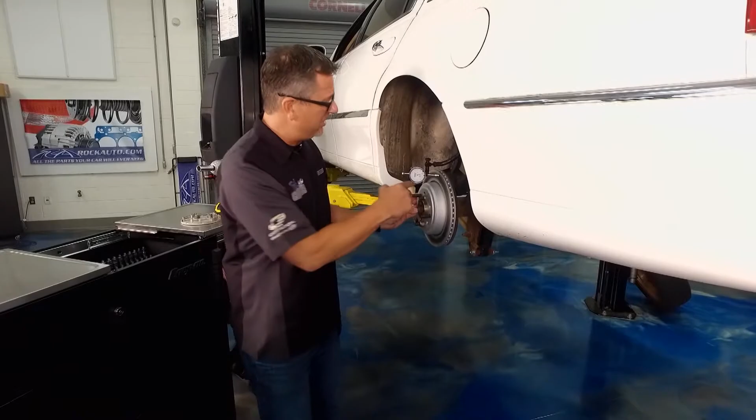Man, so much brake chatter, I almost chipped my teeth. You know what? We just did a brand new brake job. We know the parts are good, but check this out. Holy mackerel, 43 thousandths runout in that hub assembly, rotor. Something's going on. Further diagnosis is needed today on Tech Garage.

Oh my goodness, Johnny, I found the runout. We know we took the rotor off, we know that wasn't the problem, and it's looking like it's from the hub back here, so somewhere in the axle. Boy, did you ever.

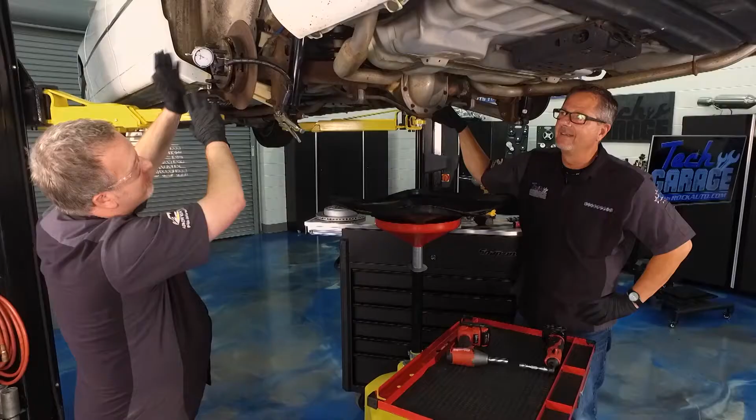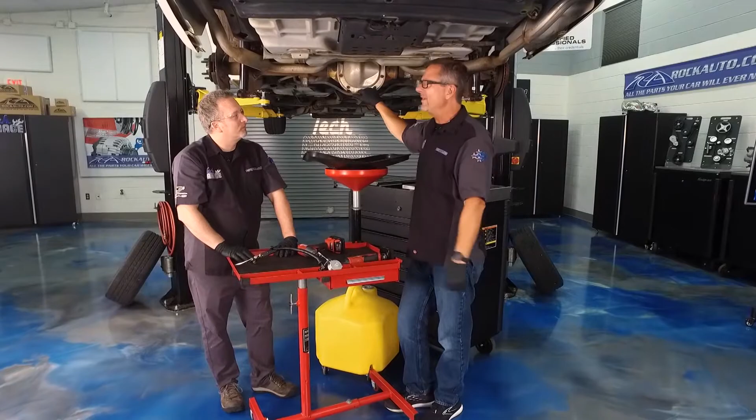Now you're probably wondering why we're starting the show with these black gloves on. Well, we know we're going to get goopy with some differential fluid. Yuck! What we need to do is, we actually had runout, chattering in the brakes. We took the rotor, measured it, we had a ton of runout. We had brand new parts from RockAuto.com, so we know that wasn't the problem. So we went ahead a little bit further, diagnosed the hub, and the hub's warped. Now we don't know if it's the hub or the axle or what's going on, but Dave, we surely know we have to open up this differential and get this axle out of here.

Before we do that, how does it get like that? You hit a curb probably, I'm guessing. Yeah, you hit a curb. No, sir, not it. But I can tell you, I think I've heard of cases where this happens if maybe there's a bumpy road, like big bumps, and you get on the power real hard. Yep, and there's some horsepower in this thing, so that can happen. Things bouncing up and down. Absolutely. Supposed to ride like a Lincoln. Right now it's riding like a baby buggy.

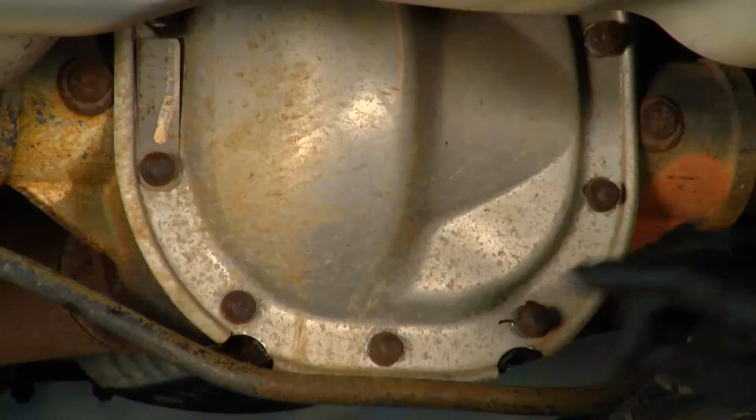But anyway, we're going to have to get into this differential and do that. So take a look at what we're going to do. We're actually going to go in here and take these bolts out. There's going to be a C-clip, Dave, that's going to hold that axle in. It could be bolted in or it could be C-clipped in, depends, we'll look when we get in there. But we need to take these bolts out, that's probably the first thing. You give me a hand, we'll start taking these out.

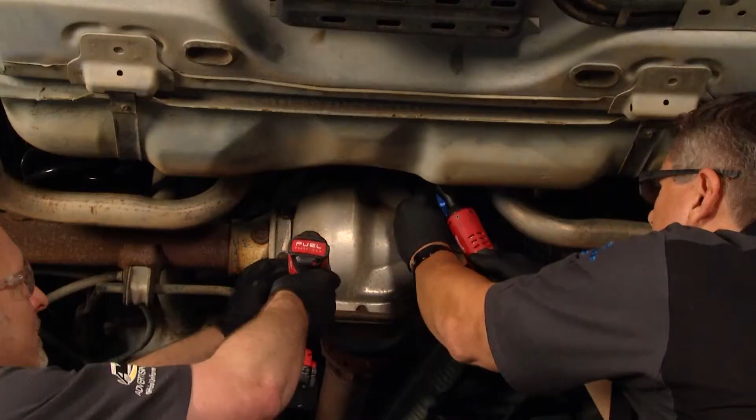Got it, fluid in here. This would be a good time to change it as well. So I guess it's all right that we're doing this anyway. Yeah, and when you change the fluid, we'll talk about it a little bit later also, we got to make sure we have the right fluid. Sometimes there's additives, and like you said, there's a service interval for this anyway, so if you're servicing a differential, you're getting a little bonus as well.

Perfect. Now when it comes to these differentials, man, they could be either, bearings could be on the end with 4 bolts, a lot of Fords do that, we have to use a slide hammer in order to get it out. But in our case, I'm hoping they're C-clips, and it's pretty interesting.

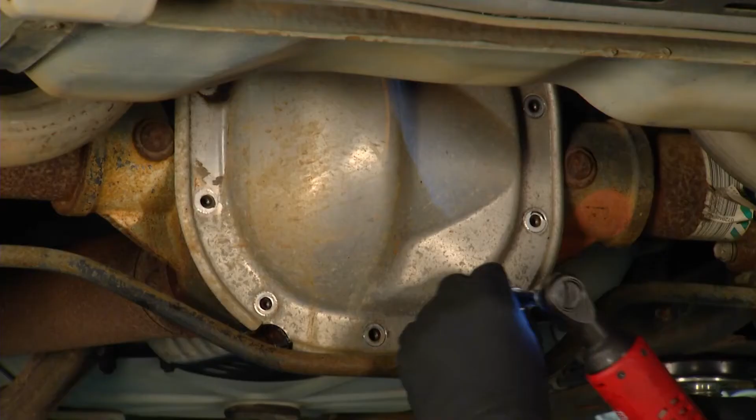But Dave, here's the problem, we got all the bolts out, and it's not coming out. And I knew that was going to happen because I don't know who's going to take the bath, me or you. The old-fashioned way, yeah, you ready? Let's see if we can. I can smell this already, by the way. This is pretty gross. Let's see if we can work this thing off. It's not going to be pretty, and it's not going to be easy.

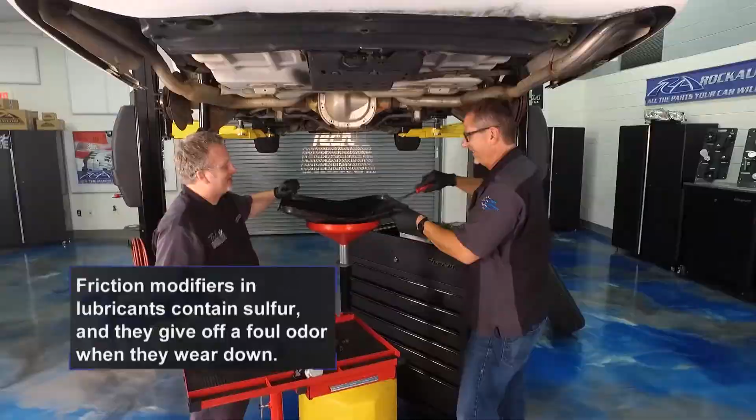No bath, but ooh, if this was smell-o-vision, you like that? Oh, that's fantastic. Lovely. Wow, so this thing needed a service anyway, didn't it? It certainly did, so it's good that we're checking this out regardless.

Well, we'll let it drain for a second. Let me see if I can pop it off. Oh man, look at that. Watch out, I'm going to sling it your way. Oh, it's stuck up there. Boy, it's up there good. You shove it up and out of the way, or do you have to bring it down?

I had to pull this little clip off of here, which is stuck up in there, which is no big deal, this is all part of the job. You guys just take your time, make sure you know what's holding it. Don't break anything. Whoop, oh, just kidding. Thanks, John, I'll put it on my head. Yeah, exactly.

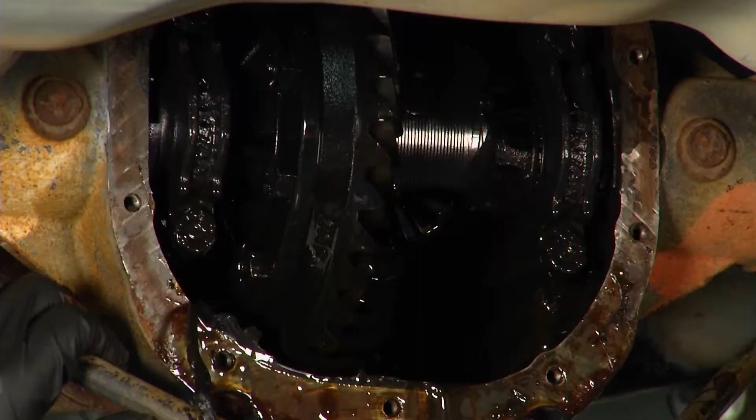And I think you kind of touched on it there. That's a huge cause of breaking parts when you're changing things. It's just being impatient, trying to force stuff. And with something like this, you've got to be gentle so you don't cause bigger problems.

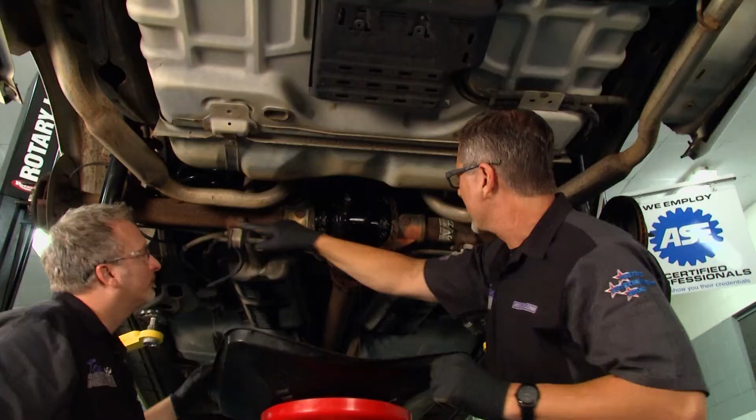Absolutely, and you can see our axle comes all the way through. You really can't see it, but Dave, I was smart enough to put it in neutral. Attaboy, so we can spin it around. You can actually see the clips inside of here. You know what, it's a pretty complex deal.

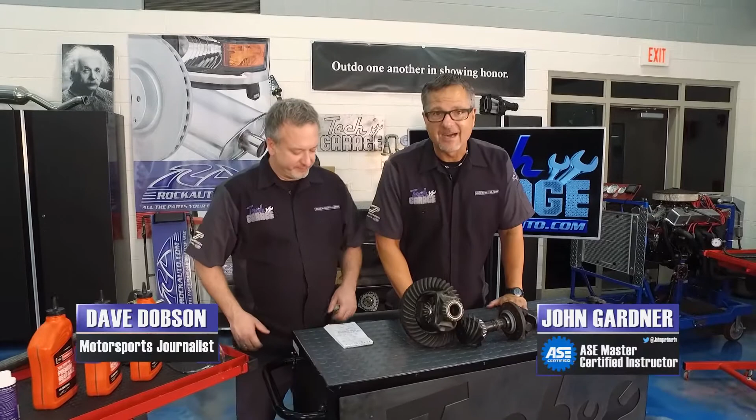Welcome back to Tech Garage, presented by RockAuto.com. Well, Dave, you made short work of that, man. You look like an expert. I think you'd done that a time or two. Yeah, and you gave me a couple of tips, too, that I hadn't heard before.

So the process was pretty simple. We had the diff cover off already. So once you're inside there, you remove the pinion shaft lock bolt, simple as using a wrench to back that out. And that's going to free up the pinion shaft itself. You got to be careful because you don't want that thing to fall out all the way, because then your spider gears are going to fall out.

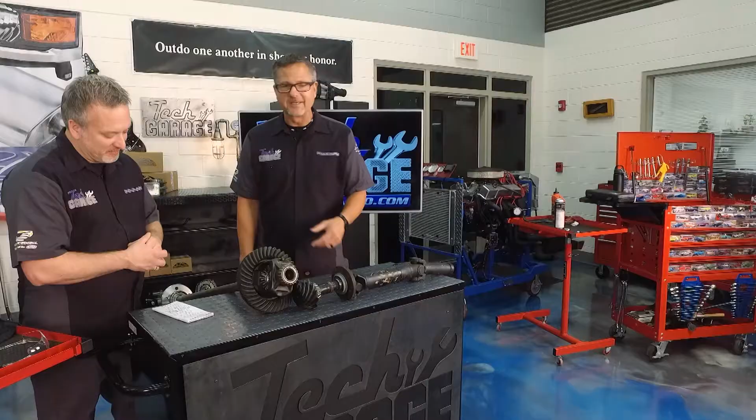And you're going to address that. That can be a super mess. You don't want to do that if you don't have to. Yeah, I'll show them that in a minute, especially when you're in a differential. And that pinion pin, sometimes that fluid's so burnt, Dave, I've seen them - we had to get a hammer, tap it back and forth. It may not fall out that easy. I've seen them so gummed up before, you got to clean that whole differential.

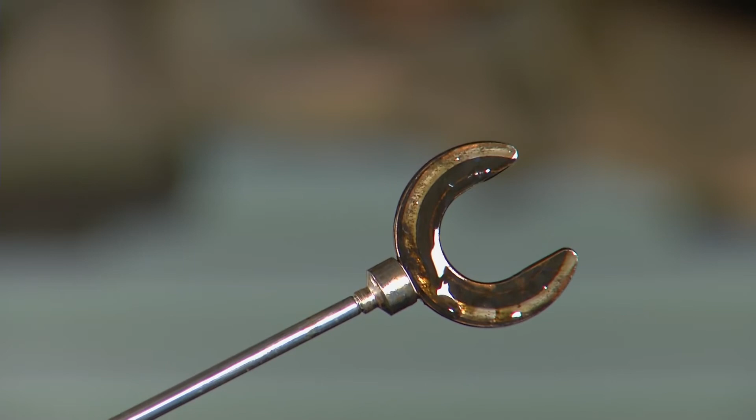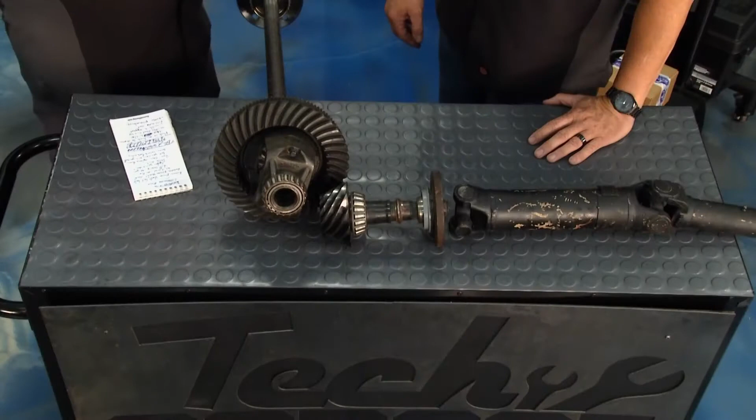From there, getting ready to actually take the axle out here. So I'm going to push the hub, and then push the C-clip out from the side gear and expose that. And then I was able to go in with a magnet and just get that out of there. Right, sometimes you can reach up there with your finger and grab it. Occasionally it's going to fall down actually to the bottom of the differential itself. You just use the magnet and pluck that out of there. Then it was time to pull the axle out. So we took that and yanked it right out of there, and we were ready for our new axle to go in.

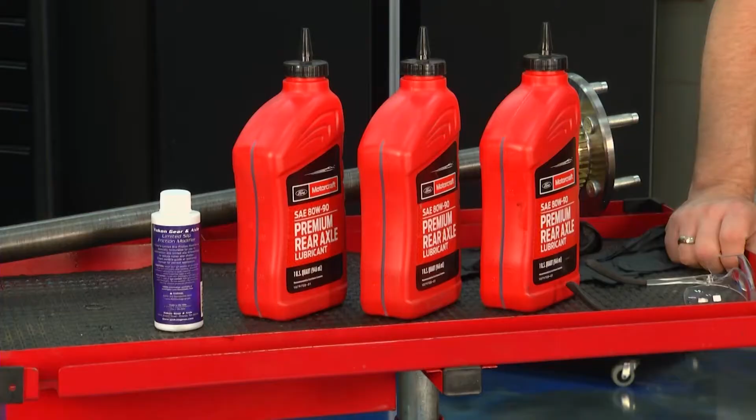Absolutely. And you know, a couple things, you get the axle out of there. There's some end bearings on this one. Sometimes they're pressed onto the axle. We'll go ahead, we'll replace our end bearings and get them all in good shape. That's a whole nother show. Fluid, just as important, Dave. You got the right fluid, my friend. You got it, John. You're going to show us here.

So this is a really complicated machine right here, and things have gotten tighter and tighter with tolerances. Things are being made by computer, cut with lasers and stuff like that. So you've got tight tolerances. You want to make sure you're using the right fluid. It's not like the old days, just dumping any old fluid in there.

Exactly, and we got some additive on the table. You're not going to need it, but sometimes there's what they call Positraction. It's actually limited slip - there's really no positive where they're locked together, but limited slip, you're going to have some clutches in here. You're going to need that special additive, just like you would in any clutch pack, so it wears properly and you're turning around the corners. I'll show you how it works in a minute.

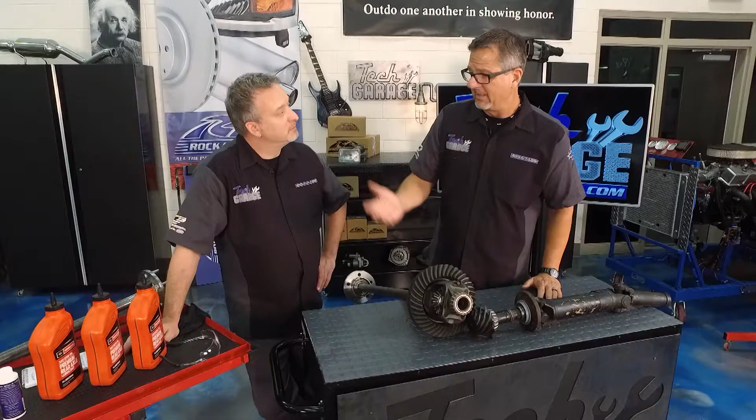Looks like you got your hands full with a lot of work. You got it, I'm going to go get to work, sir. You do that, all righty.

Meanwhile, let's check out a whole differential and how it works. This is pretty neat, so I got a little mini drive shaft here because this is coming out of the transmission and it's heading over to what's called a pinion.

It drives the pinion right here. These U-joints are connected to a yoke over here and you're driving your pinion. Now your pinion's going directly into here, which is called the ring gear.

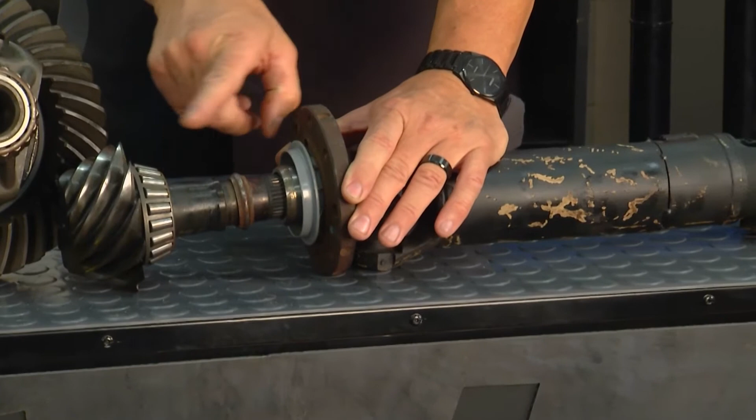This is what Dave was dealing with. This is actually a whole carrier assembly, and what's happening is I'm going in this direction and transferring out to the wheels. Now this is a helical cut gear, which is pretty cool.

It's not as strong as a straight cut or spur cut gear. It's helical cut. In your spur gears, you probably heard in reverse, when you back up, that's a spur cut gear. And when you're going forward, they're helical cut gears, so they're a little bit quieter, but they are strong.

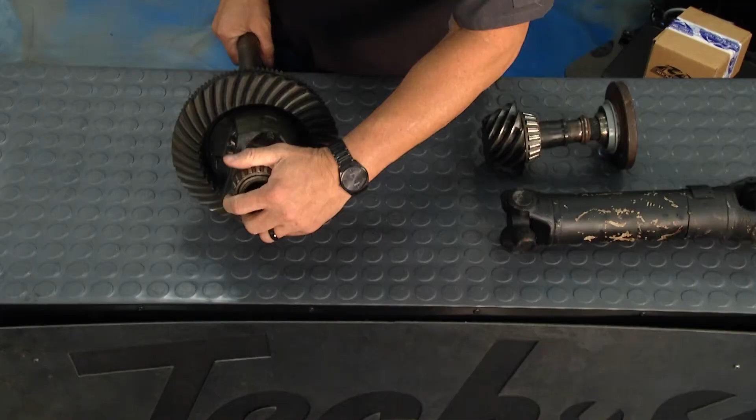So this is the actual axle right here. My axle's coming in just like Dave's. You can see right in here, if you look real good, you can see the clip. Now it won't come out because that's the only thing holding your wheel on.

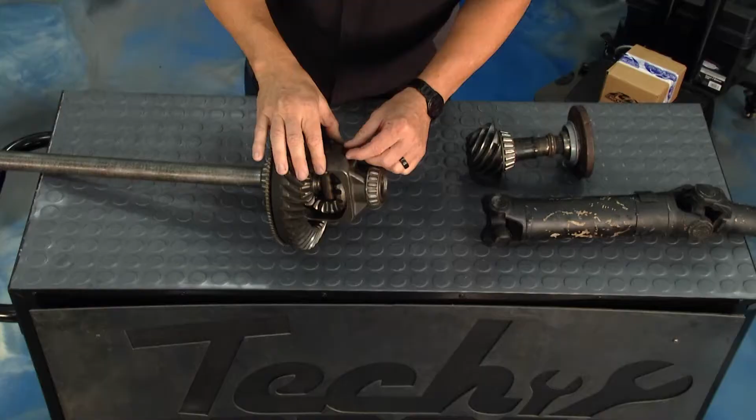That's scary. Think about that for a minute. If that clip falls out or this falls out, that axle's coming out, your wheel's going with it, shoop, right by you. So I'm gonna pull this out just like Dave did, to give you a close-up look, plus I want to show you the spiders and the side gears.

So if I pull this out right here, there's the actual pinion shaft, the same thing he pulled out. Now, right now, the clip won't fall out. He said a lot of times it will. He reached over here with his arm, pushed it in, and voila, there's the clip.

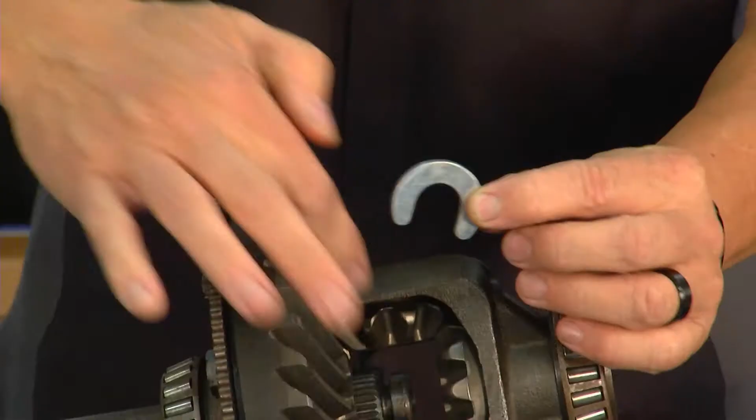Just that easy, it's gonna fall out. Now, it might not go that far because you got the other axle on the other side, but there it is, there's the actual C-clip. Now the axle's free to come out, so we can go ahead and remove the axle.

Let's see, that's a heavy one. All right, put that right there.

Now, if you look inside of here, you got two things going on. You have side gears and pinion gears. Why is that? Well, if I turn the axle, I want to be able to turn the corner at a rate where both axles aren't locked together.

And you can see it right there, I'm turning it. That's what the pinion gears allow you to do, turn without getting any damage to the car. So I'm going like that, they're spinning at different speeds.

Now I can actually pull them out here, and what's going on when I pull them out, there they are. There's your pinion gears. Dave said he locked it so these wouldn't fall out.

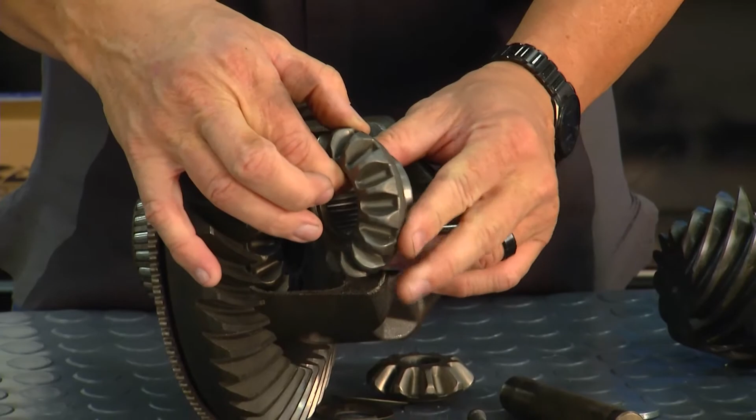And if I push on this one, there's the side gears. So the side gears are running around the pinion gears. The pinion shaft's driving the ring gear. Man, we're up and going.

Hey, let's check in with Dave and see how he's coming along.

All right, John, we're going to reverse the procedure we saw just a minute ago. Now we've got Benjamin, our assistant, giving us a hand putting in the new axle. Go ahead and bring it in. It's pretty delicate, and you got to remember, you only have to move it a little bit down at his end to find the mark there and get it between the side gears, and he's got it popped in.

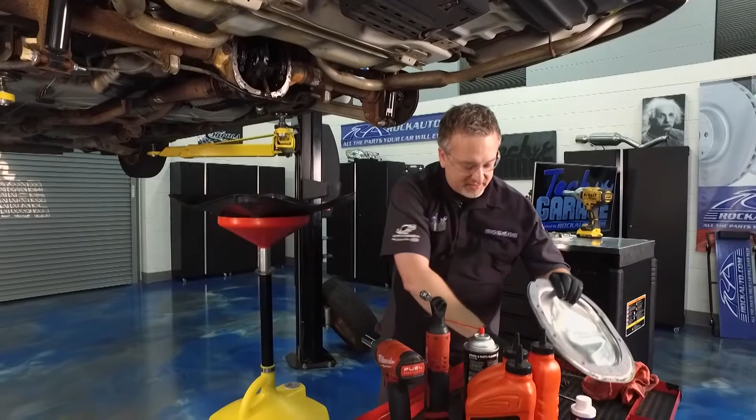Very cool. So now we're going to get our C-clip. I should be able to put it on there by hand. Back in the spot, let's see. There we go, we got it seated. Now pull it back out, and that'll seat it there in the side gear, and we are good to go.

Thanks, Benjamin, we are good to go. Now we've got to put the pinion shaft back up, and then the lock bolt that goes in, that'll hold that together, and we will button it all back up.

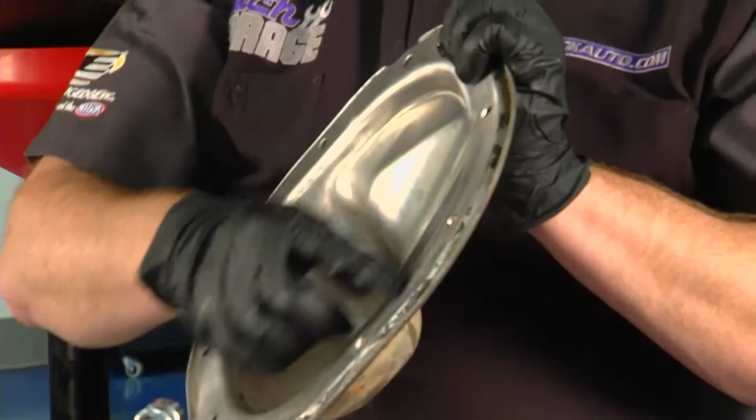But before we do, I want to show you this. This is the differential cover, and it was nasty before this. It had goop all around it. We went outside with a wire wheel and cleaned that off.

We also cleaned the other surface here on the casing to make sure this is free of all kinds of debris, because if there's anything on this, it is going to create lots of problems down the road, and you're going to have to do this job twice.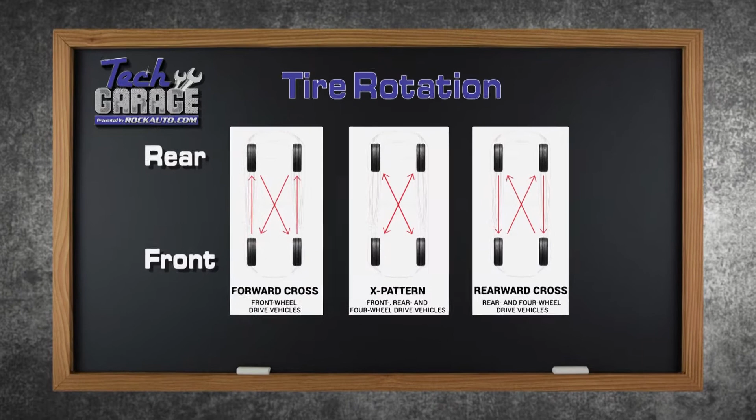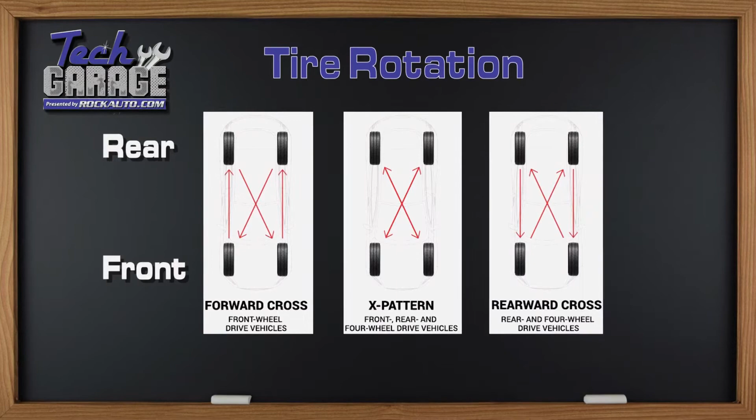First thing you can do to extend the life of your tires is do a tire rotation, and you can see it right here. Depending on the vehicle, a lot of front-wheel drive vehicles use the forward cross, that's a method to do it. You can do an X pattern there if you have 4-wheel drive, or you can do the rearward cross. There's 3 different ways to do it, but definitely look at your tires. You may have different size tires, or you may have directional tires, so in that case you may not be able to rotate them at all. In the shops, a lot of times we just like to put the front to the back and the back to the front to stop any pulls, so we don't have any tire pulls or tire issues.

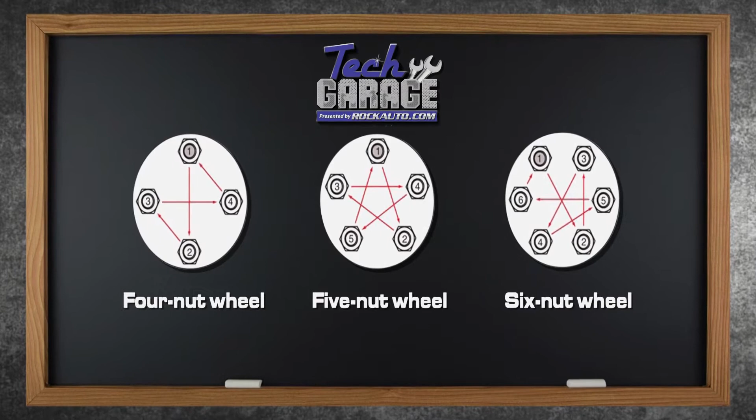Another thing, super important, when you put your tires on, you want to make sure you torque them. Torque the lug nuts. Why? Well, first and foremost, you don't want to warp that hub or warp the rim or do any damage. So you can always do it in a star pattern. You can see right there, you have a 4 lug nut, 5 lug nut, or 6 or 7, it doesn't make any difference. The point is, go in a star pattern, go across from the lug nuts back and forth.

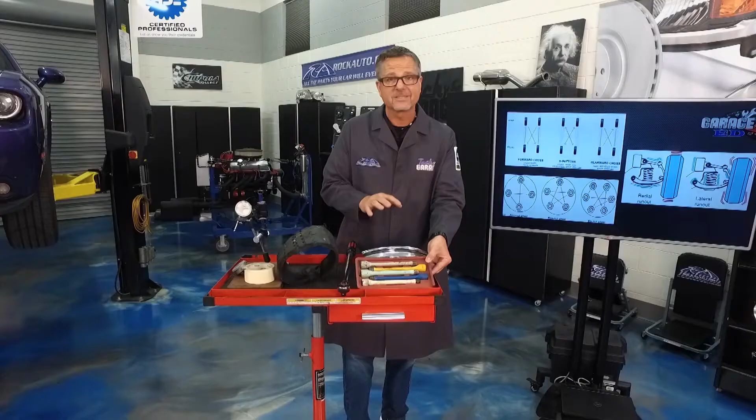Now, when you're torquing them, you want to use the proper torque specifications. You can use these right here, these are called torque limiting adapters. We actually call them torque sticks in the industry, and these things here kind of flex at the right torque, so you know you're getting the right torque when it comes to putting the lug nuts on. Still in a crisscross pattern, or you can use an old torque wrench, that's the best way to do it. Just wait for the click, put it to the proper thing, you'll have no issues.

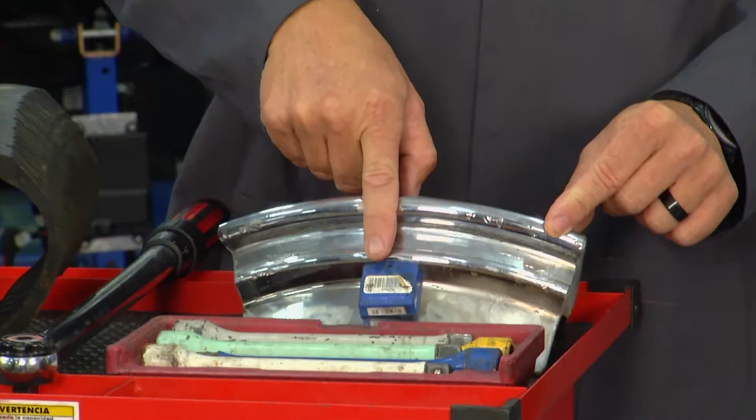Now, also be careful. When you rotate the tires, you may have a tire pressure monitor. The tire pressure monitor may have to be relearned to where the tire position is, so on the dash it doesn't come up with a false reading. That's a whole other show on Tech Garage, and we'll take a look at that in a later season.

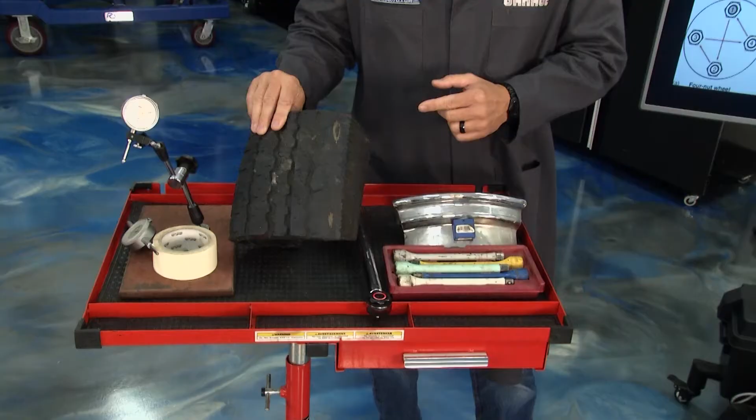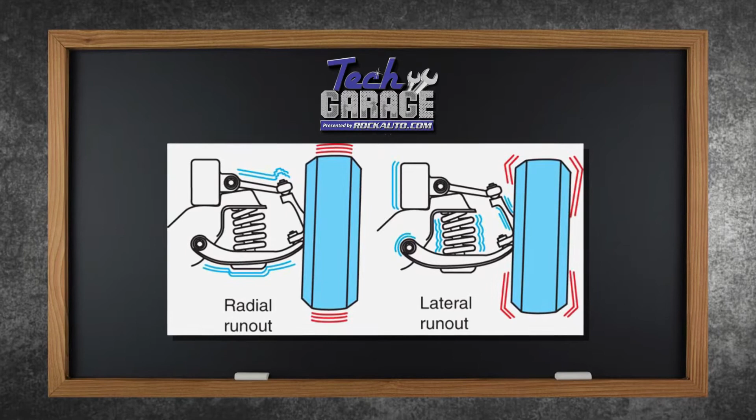Now, when it comes to tires, you also want to be able to read the tires. Right here, you can look at the tires, and you can see that there's some wear here. We need to know what's going on with that, along with 2 measurements called lateral and radial runout. Radial runout is basically bouncing up and down, that's when you get that hop in the car, and then you may have lateral runout, kind of the shimmy in the seat, that side to side, but we're going to have to do that with a dial indicator, some tape.

We need to understand about all that stuff. We need a little help. Dave, how about a little help? Well, glad to help out here, Ed.

As you mentioned, there are two types of runout. We've got radial runout, which is what we're testing here, and lateral runout, which is side to side. We'll talk about that in just a minute.

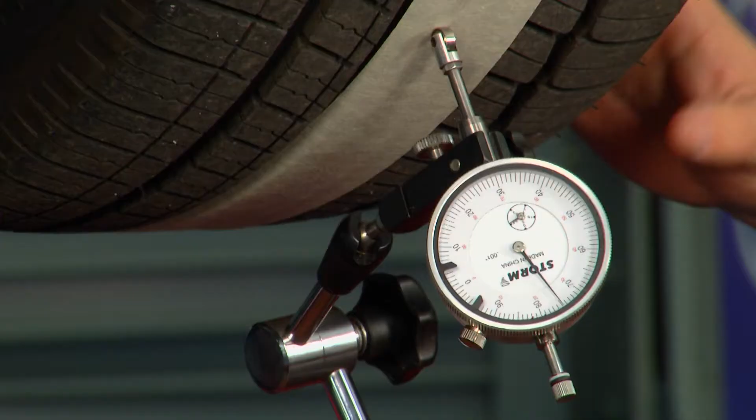So you can do this on your driveway, or set your car up on jack stands. We've done it here on the table, and it's not going to be real precise because you can wiggle the table, but it doesn't have to be that precise. You have to see the gauge move between 45 and 60 thousandths of an inch, and I don't think it's going to move that much.

And as we look here, this tire is pretty good, moving no more than 10 in each direction, so we are just fine. By the way, a little trick here that my buddy John Gardner taught me.

You don't want to get this dial indicator stuck in the grooves of the tire, so you just run a piece of tape around it, and it's nice and smooth as you go all the way around. So again, taking a tour of our tire, we see that it's only deflecting just about 10/1000ths in either direction, so we are just fine.

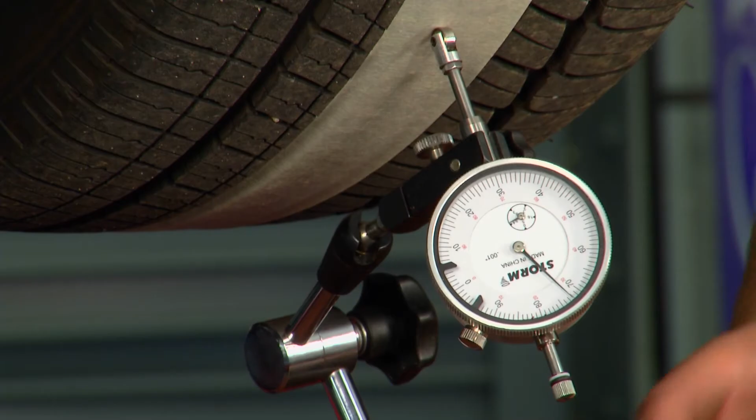Now, testing the lateral runout of your tire, moving from side to side, you do the same thing. You put your dial indicator here on the side, you run it along the sidewall. Sometimes a belt might shift or something in the tire, ends up being warped, and that's the shimmy you feel going down the road. Believe me, you'll know it when you have problems with that. Measuring to the same tolerances and the exact same way, that is how you get your lateral runout.

When we come back, we're going to learn all about torquing bolts, and there's a whole lot more to it than you might think, so stay tuned to Tech Garage, presented by RockAuto.com.

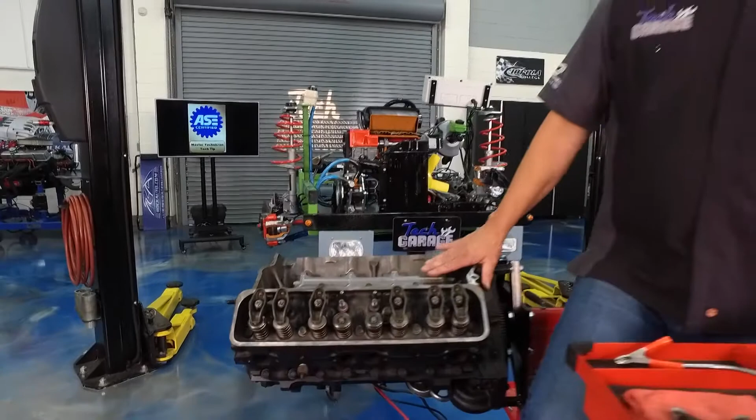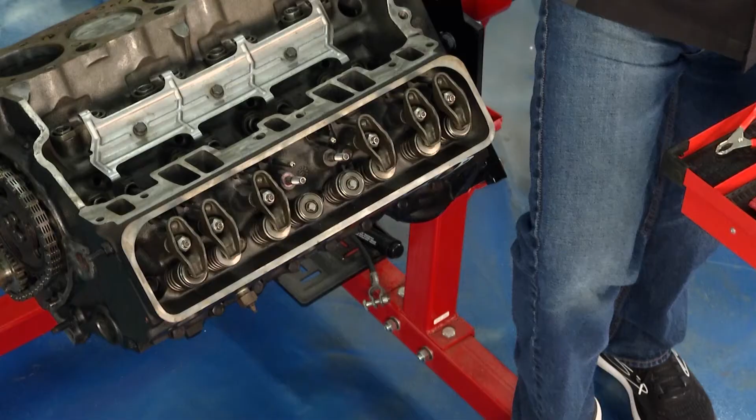It's more important now more than ever. Why is that? Well, you've got dissimilar metals in these engines, different expansion rates, the gaskets are getting tighter, and the torque specifications are getting more accurate.

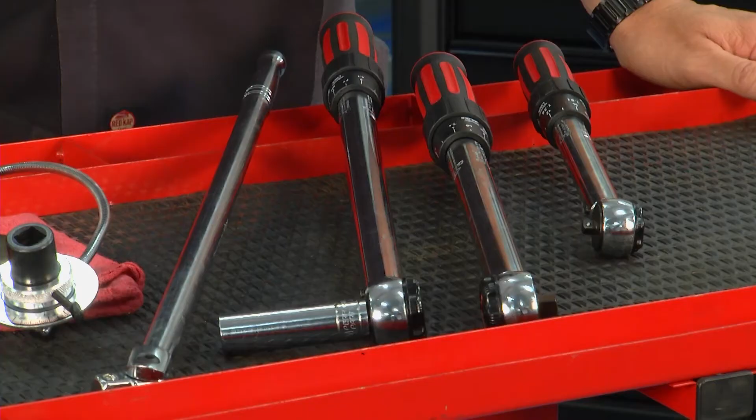So what do you want to do? Well, you want to grab a torque wrench, and RockAuto.com has a whole line of torque wrenches, all the way from a 1/4-inch drive to a 3/8 drive to a 1/2-inch drive. If you got a little 10mm bolt, you definitely don't want to put a 1/2-inch torque wrench on it because it's too small. You want to use the little one.

So the torque specification is really going to dictate what torque wrench you use. We're going to do it on head bolts, and there's a sequence to it and a specification. Look at this graphic right here, you can see the actual sequence. It goes 1, 2, 3 in order, working your way from the middle out, and then you're working the bottom bolts. That's very important to get that even distribution of torque.

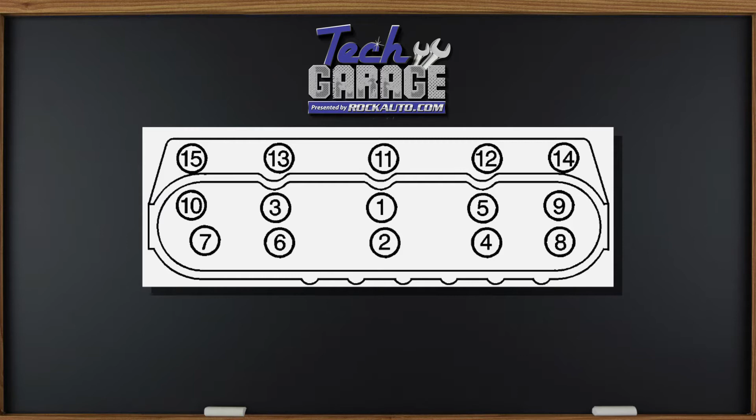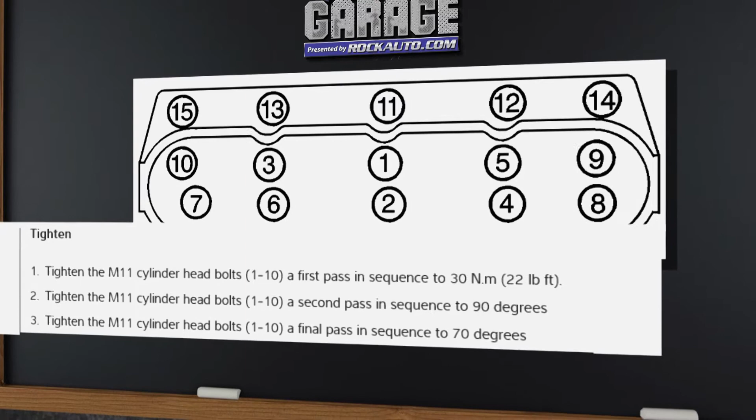Even more important, you have the specifications. If you look right there, you can see it's 22 foot-pounds. That's not a lot, I know what you're saying, but then they want an additional. So you put the 22 on it, then you put an additional 90 degrees, you come around again with another 70 degrees, which puts it to its final torque.

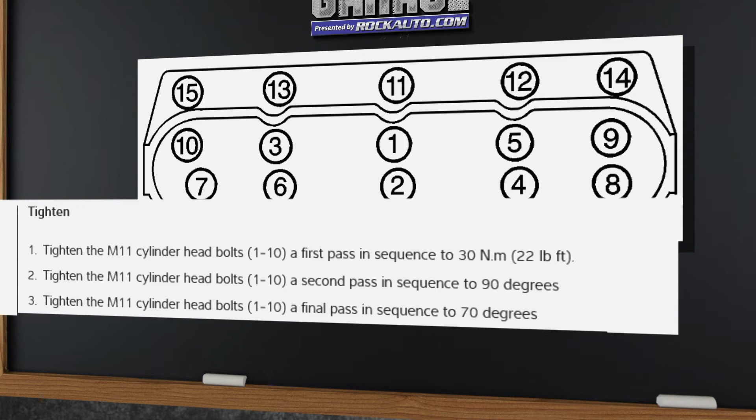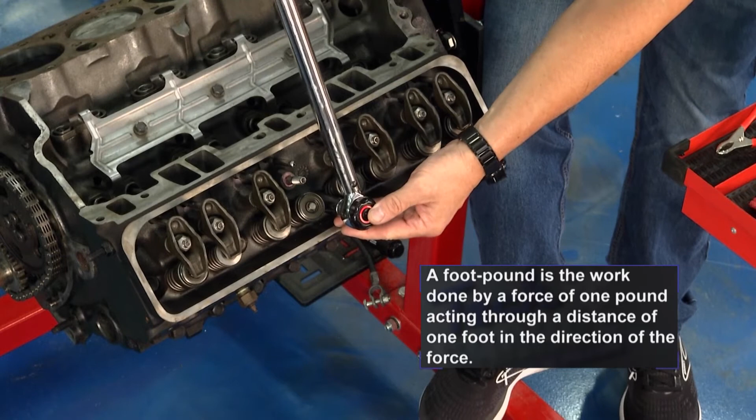Super, super accurate. And I can show you how to do it right here. We'll go ahead and use the 1/2-inch torque wrench, and I'll come down here to this center bolt just for demonstration purposes. I got this thing set up at the first torque, so we'll come down here and get a little click in it right there. That's good, so we know we're at that point. It clicked and we're safe with the first torque.

Now the key is this torque angle gauge. This is pretty neat. So this torque angle gauge, I'm going to set it up right here on the bolt for you and show you how to use it.

So we'll put it on the bolt, and what's going on here, this is actually moving. So we want to fix that base so we can get a fixed reference point right there. Now we're fixed, and I'm going to take this and set it on zero.

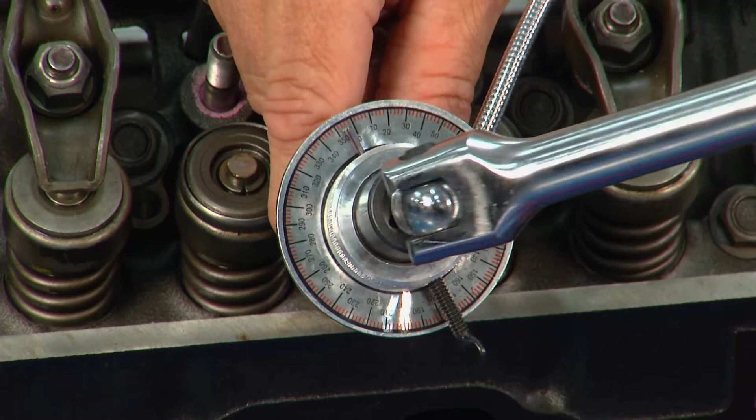Why did I do that? Because now everything's fixed, so when I turn the bolt, this gauge is going to move with it. I'm going to try to get this down here out of your way so you guys at home can see it. Go right here, over on this side.

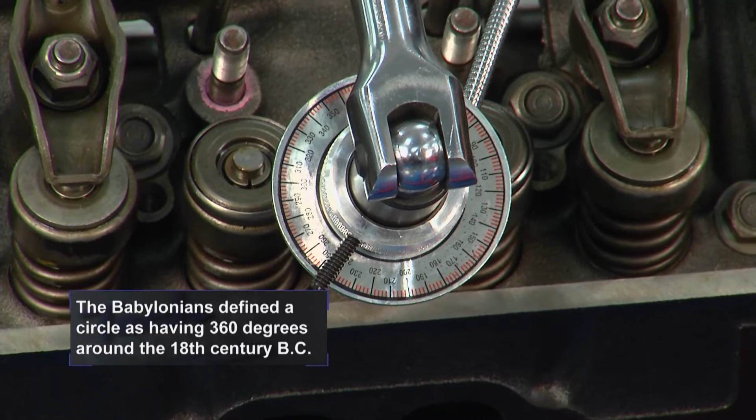I'm going to pull across the motor. Now watch this gauge, as I pull across the motor, that gauge is moving. So I just go on to whatever the specification is, go around, do all the bolts. You can see it moving, and that's giving me a perfect, accurate torque specification every time. That's critical. Make sure you use the right torque specifications and the right torque sequence.

Well, you can't torque a part unless you have the right part. And RockAuto's got us covered finding all the right parts.

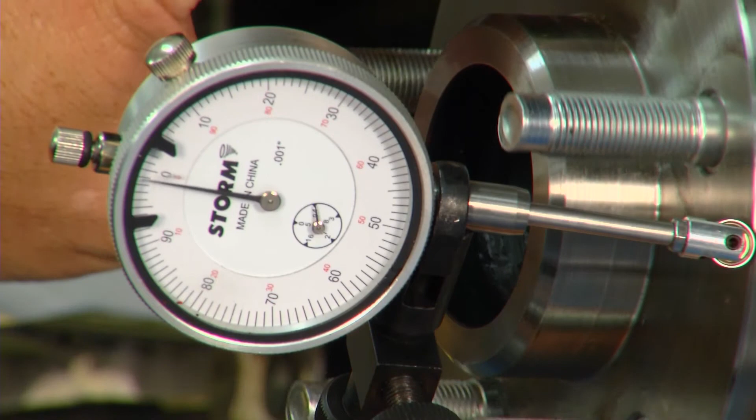Wow, look at that, almost nothing, just a couple of imperfections there on the dial indicator, but boy, what a big difference, Dave. Holy moly, I'd call that success. I call it 2-0, baby.

Absolutely, it was a pretty simple job. I mean, you made it look easy, that's for sure. Well, I appreciate the coaching, first of all. I got some tips and tricks that kept us from letting those spider gears fall out of there, and a few things to make the job easier.

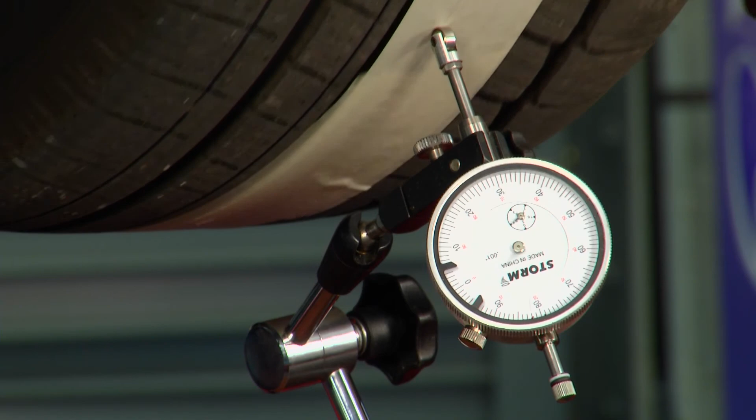Yeah, and we're getting pretty good with the garage. We had tire service, that was dial indicator, lateral runout, radial runout, tire straight, rotor straight, hub straight, we're rolling smooth, baby. And we also talked about torquing properly, because that could lead to problems with all the aforementioned and a whole lot of problems all around the car. Make sure you check your service manual to get all the proper torque specs on everything you do on the car.